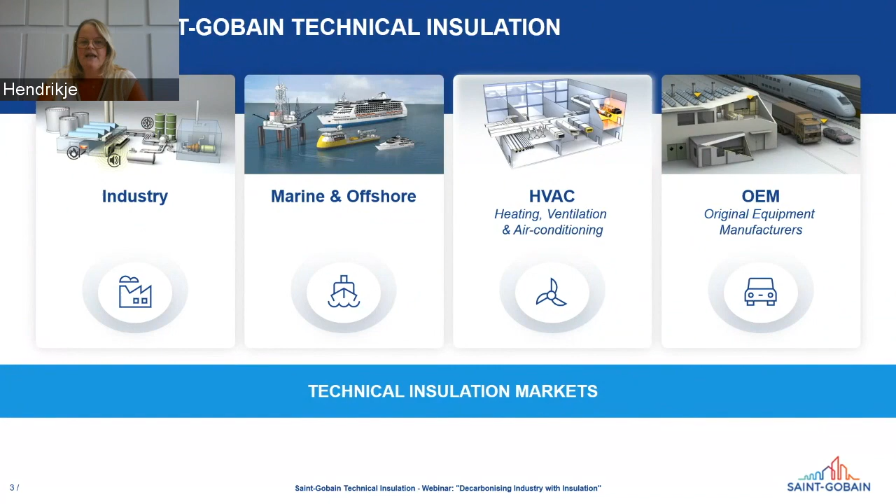We are present worldwide through our two international brands, ISOVER and Kaimann, as well as a certain number of local brands. Our strength is that we are not only global, but also local, because we have dedicated teams in a certain number of countries, with dedicated production sites in many regions. All this allows us to be close to our customers.

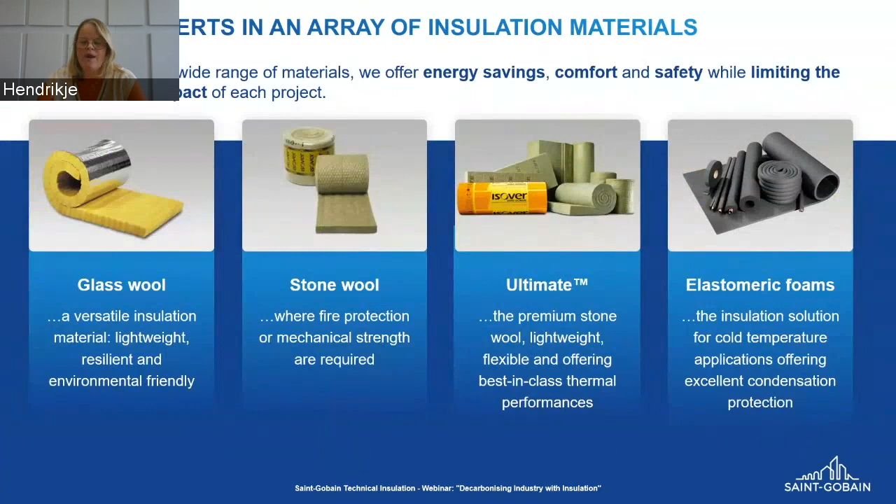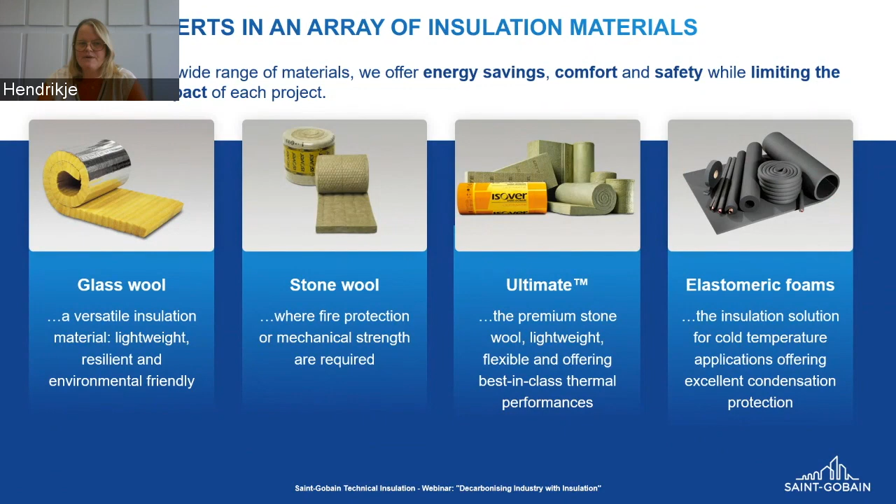We are experts in an array of insulation materials. The ISOVER brand stands for mineral wool solutions out of glass wool or stone wool, mainly used for applications above ambient temperature, which can go up to very high temperature applications, up to 700 degrees. The Kaimann brand stands for elastomeric foam solutions, dedicated mainly for cold applications below ambient temperature where there is a risk of condensation.

Today's topic is decarbonizing industry with insulation. We will hear during the next 45 minutes how insulation can have a positive impact on energy consumption and on CO2 emissions in the industrial sector.

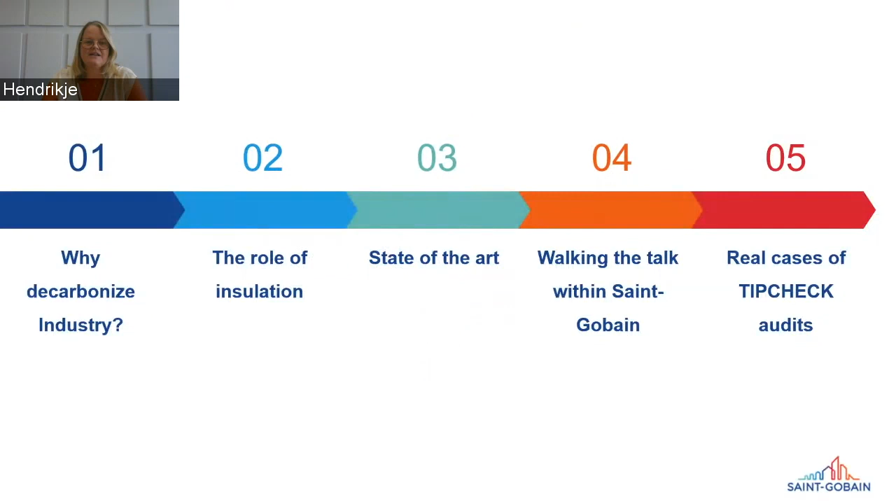Let me explain very quickly what the agenda is for today. We will go through a path of 5 different blocks in this webinar. First we will try to understand through the figures what the position and role of insulation is. Later on we will have a look at the current state of the art and future possible state of the art of insulation inside the industrial world.

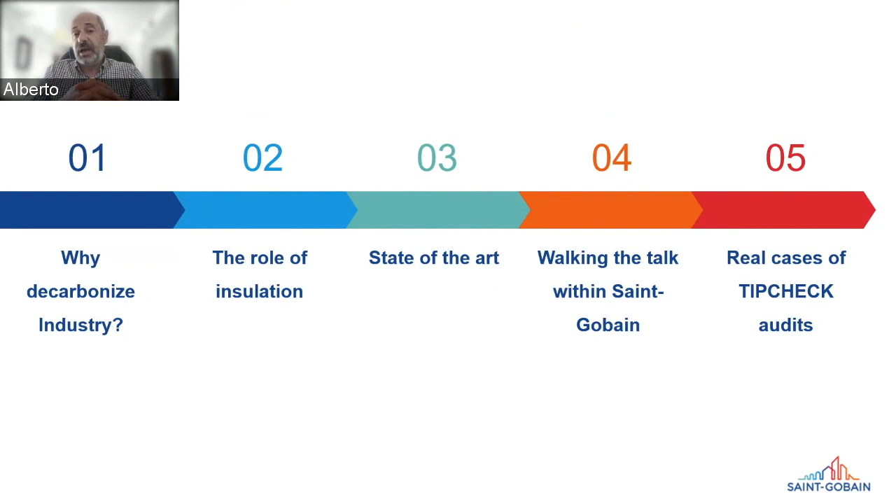Finally, we will show you some real examples of how we are doing things inside the Saint-Gobain group, and some TIPCHECKs that you will see - what a TIPCHECK is inside this presentation that we are performing - and which results come just behind.

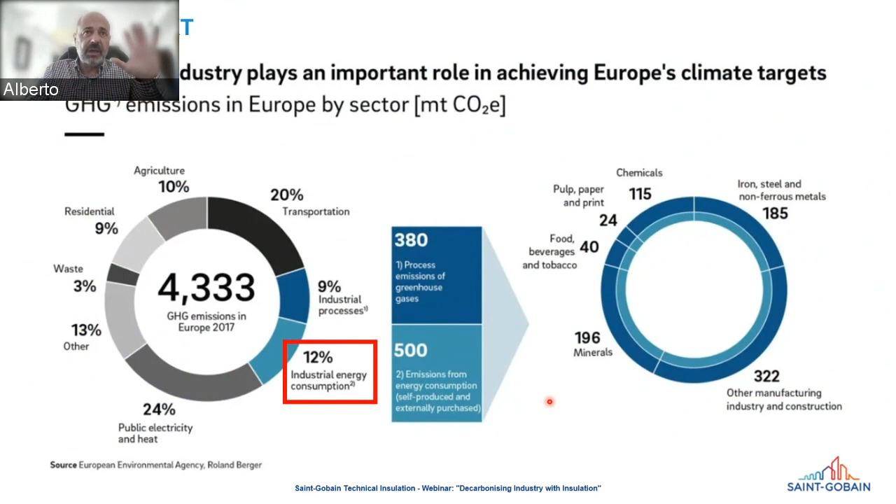And here is where you will see that insulation can play an important role, even more in dealing with today's situation. We have a lack of energy resources in Europe. With the crisis with the war in Ukraine, we can see that we are struggling for having gas in our stocks, and even the same with the fuel. So actually the prices have rocketed in the last 2 years, and it's not only about prices, but about the amounts of energy resources that we have in our hands.

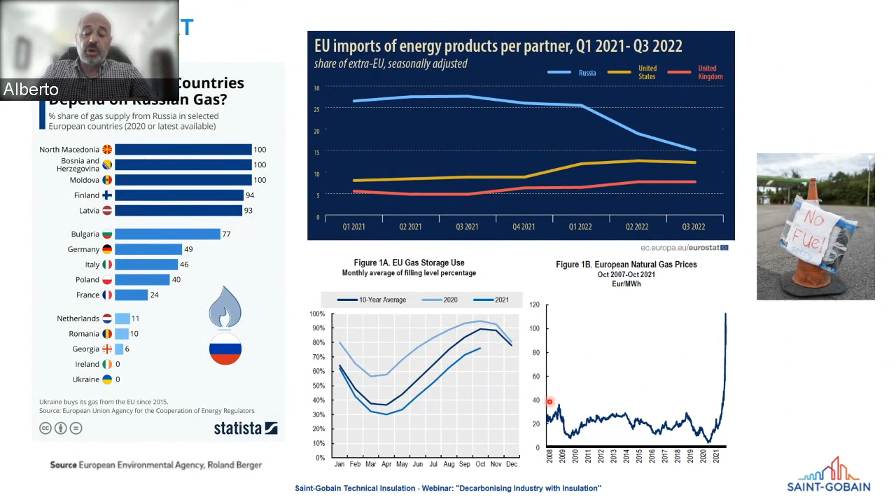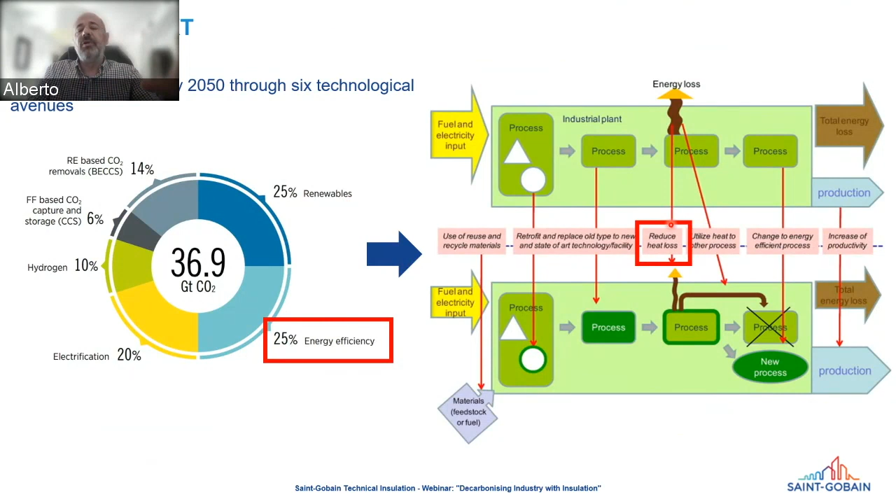So let's have a look a little bit deeper about the role of insulation in this kind of game that we have. And the first thing that could give us an impression of how our systems are working is the surface temperature that we have in our machines, in our pipes, in our flanges, in our valves, in any kind of element that we usually have in an industrial plant.

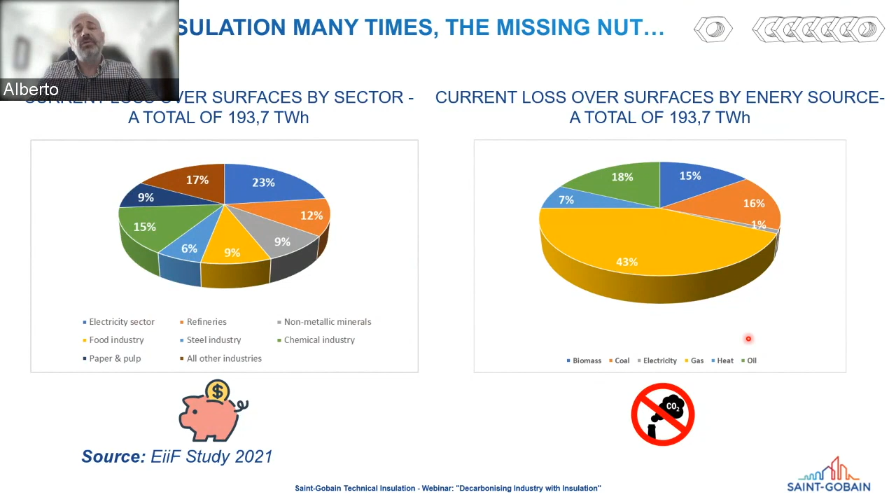And if we have a look at the energy sources, the consumption of these energy sources, we see that the biggest issue that we have in industry is really linked with gas. And gas is precisely what we are lacking, because the gas coming from Russia in the north of Europe is not coming anymore. So the situation is becoming quite critical. But in front of CO2 emissions, you see that gas is playing an important role, and gas is emitting CO2 as well. So no matter how you look at it, it's quite easy to understand that we need to attack these massive losses that we are having through the surfaces of our equipment in the plants.

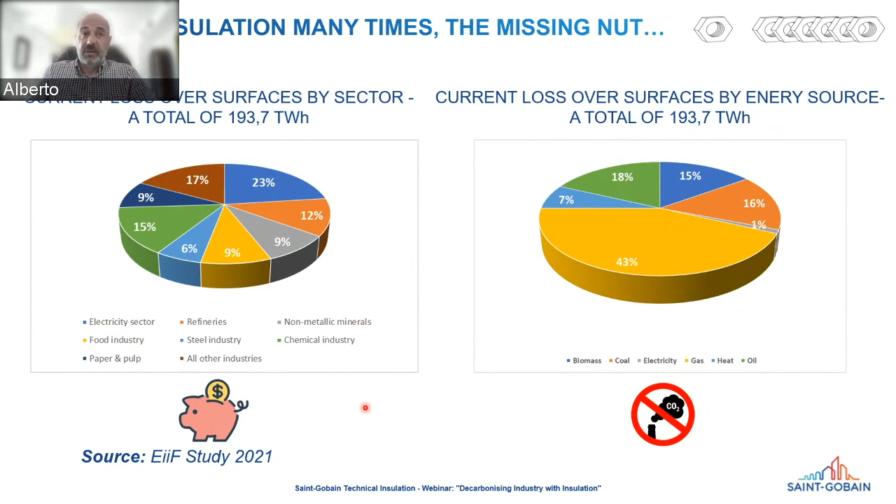So how big could the savings be? Something like 10 years ago—and I will tell you a little bit more about this European Foundation—there was a study carried out in Europe just to understand how big the losses were and what was the potential in terms of savings.

And what they analyzed were two different scenarios: the current scenario that we have, and then two different scenarios. One scenario is if we would design our stuff with a cost-effective look, let's say. And there's another scenario that is a little bit better, designing our processes and our machines with an energy-efficient approach.

That is a little bit different. In some slides, I will show you a graph that probably will make it very clear.

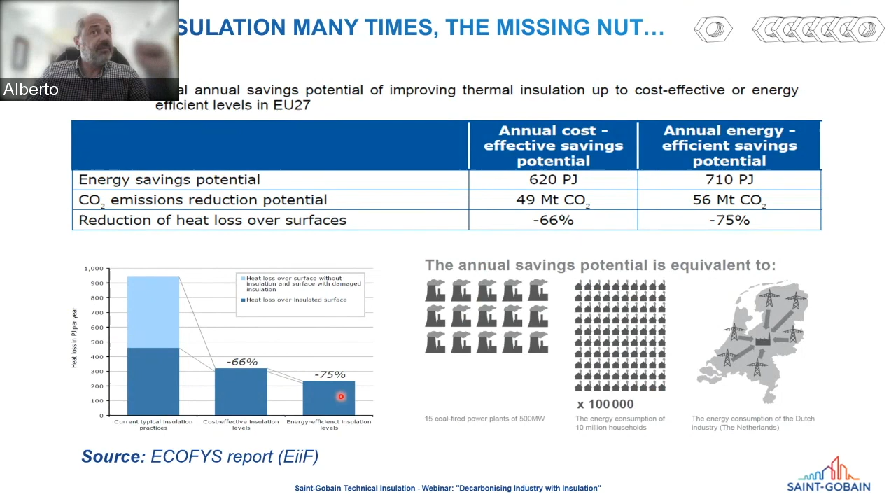Coming back to these two different schemes, we could reduce these losses by 66% just by designing our items following a cost-effective scheme, and we could even save up to 75% of the total losses through the casings and claddings of our pipes. So now it seems to start being clear that massive savings can be done relative to the use of insulation alone.

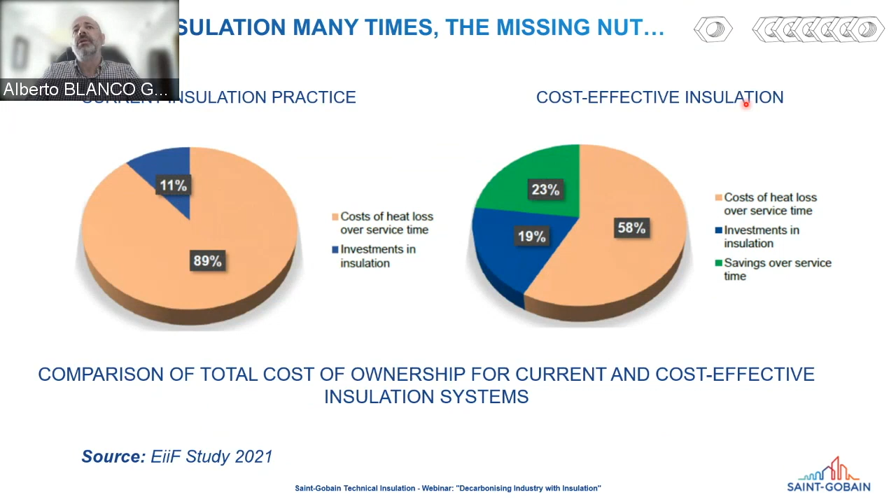Our proposal, when we suggest moving to cost-effective insulation, is to increase this 11% up to 19%, so increase the insulation amounts, and just by that, you can reduce your total bill along the life of the element by 23%. So again, the savings are quite massive.

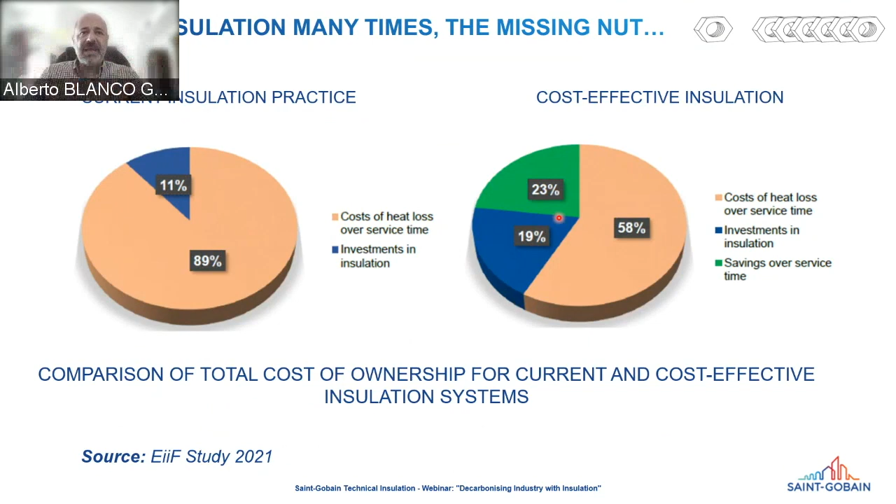But still, I guess it's quite difficult to make an idea of what these losses mean. So let me show you one example: imagine an uninsulated industrial valve. In this case, not a very big one, so DN 150, with an inner temperature of 150 Celsius degrees. In industry, 150 Celsius is not so high a temperature - it's quite normal to find processes with 300, 400, even 500 degrees.

So this temperature is not extreme, it's quite normal in an industrial process. Let's imagine this valve is working the whole year, all the time. The energy losses per year in this single uninsulated valve would be around 10,600 kilowatt hours along the whole year. Is that big or not? Probably so far you cannot understand exactly how big this figure is.

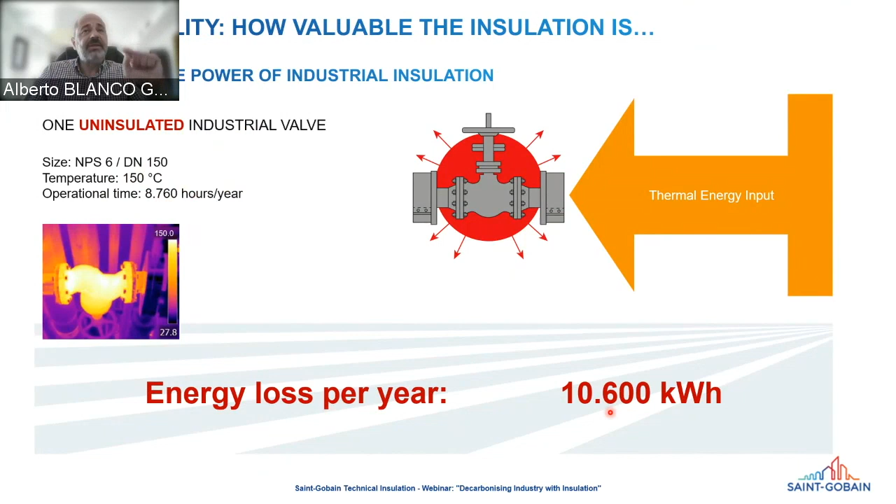But what you will understand immediately is that just by insulating this valve, we could dramatically drop the amount of energy lost. Our energy savings per year could be around 10,000 kilowatt hours, reducing the losses from 10,600 down to 600 kilowatt hours - a 95% reduction of the total losses we had before insulating this valve.

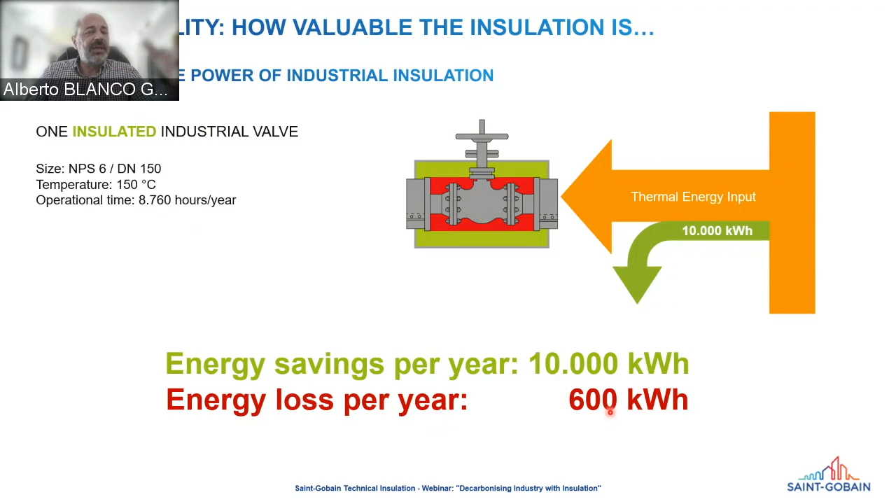Coming back to these figures, when we talk about kilowatt hours, nobody understands how big it is. Let's illustrate it with a real example: if we translate this 10,000 kilowatt hours we can save just by using insulation, we could run a Tesla model for 20,000 kilometers.

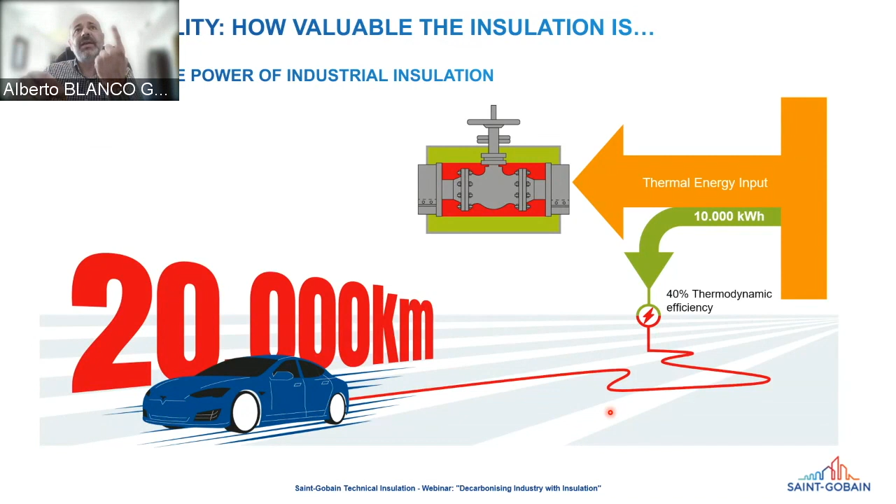Now you have a clear image of how big the energy we are losing in one single valve is. Let's imagine a real industry, a typical petrochemical compound. It's quite normal to have 20,000, 30,000, up to 50,000 valves and flanges in the processes of one refinery. So now multiply this 10,000 kilowatt hours by 50,000 elements or fittings that we could have in the process.

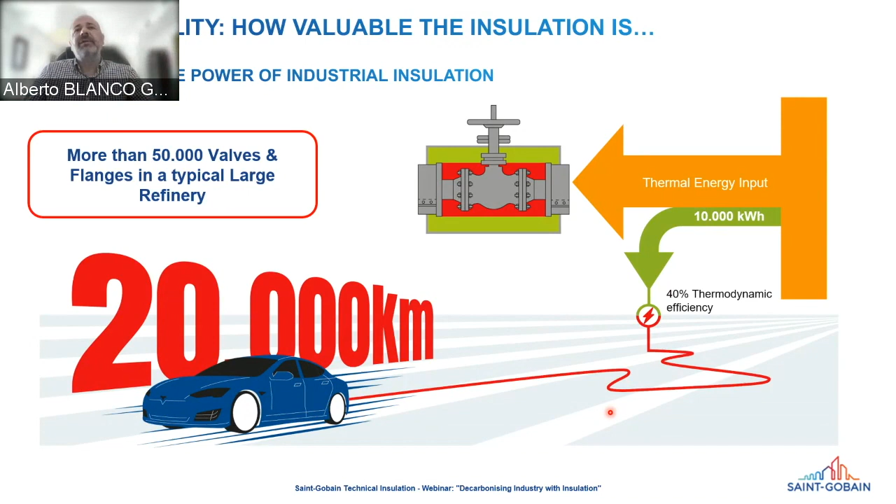Now I think the idea is quite clear about how massive the amount of energy is that we are losing, the thermal energy that we are losing in our industrial processes. Maybe it's the first time you're in front of this clear idea, and maybe at some point you feel a little bit dumb because you think, okay, I never thought about this. But believe me, you are not the only one.

Here I would introduce myself a little bit. Before being in this position, as Hendrikje introduced me, I was production and maintenance manager in one of our plants, one of our insulation plants.

Every single year, my colleagues from the EHS department came to my office and asked me, Alberto, what do you have in mind for next year? How are you going to save energy and reduce the CO2 emissions? And I was always thinking, okay, we will improve the leakages in our compressor and use the compressor only when it's required. We will change the valves to efficient valves. We will play with variable speed drives. We will buy more efficient engines, blah, blah, blah.

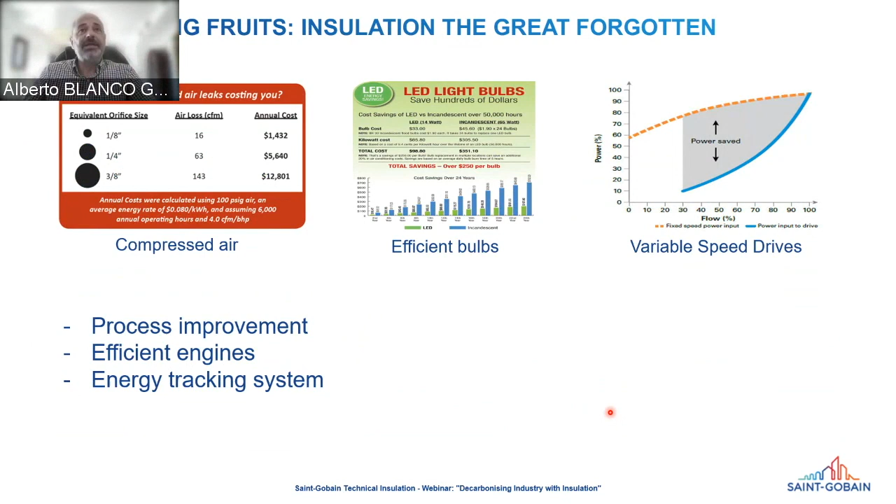But I never, ever, even working in insulation, thought about insulation as a possible source of energy saving. And it's really a low-hanging fruit. It's something that is quite easy to be done.

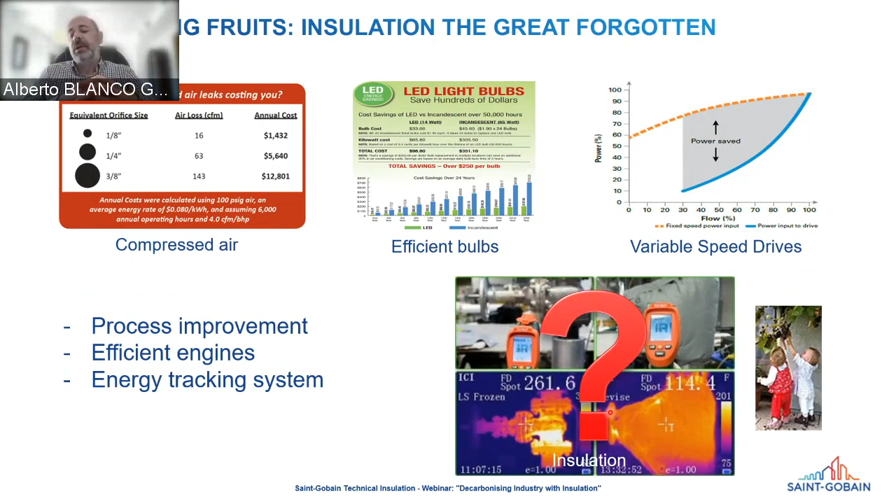So just having this in mind, how was it possible having this situation in Europe and nobody seemed to be doing anything? Well, that's the reason why a little more than 10 years ago, what we call the EiiF Association, EiiF being the acronym for European Industrial Insulation Foundation, started to develop work on this topic. The main aim of this European foundation, a non-profit foundation, is to promote and establish the use of industrial insulation as a widely understood and accepted means of achieving sustainability.

So it's completely linked with CO2 emissions and energy. And actually, you know that in Europe we are not achieving exactly the targets we set for ourselves. In 2020, we failed to reach a 20% reduction in energy consumption. And why is that? The reason behind that is the lack of regulation in industry.

When we compare the situation we have in industry with the one in the building industry, we see that it's absolutely different. In building, we have very clear regulation about the losses we can have through the walls or the roof of our homes or buildings, right? And they are pretty low. If you look at the figures on screen, they point to 10 watts per square meter.

But when we go to an industrial setting, imagine a power plant, and compare the temperature in the processes inside, which could be around 250 Celsius degrees on average, compared with the 20 or so degrees in our homes, you see the losses imposed by the building code. But in industry, we have nothing that is really compulsory. The only thing I could find is a kind of indication in an old German standard recommending something around 150 watts per square meter.

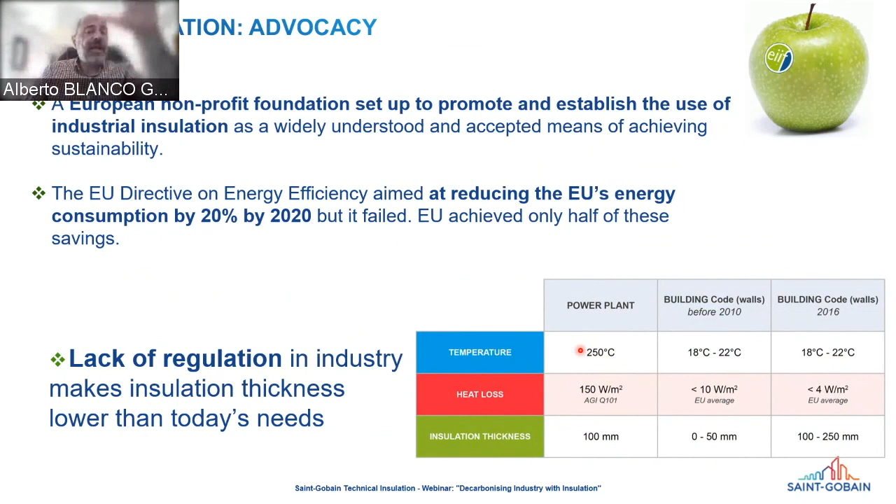In this case, you see that in these processes, having 250 degrees inside the pipe or duct, we use on average 100 millimeters as insulation thickness. So you see that even in modern building codes, we use more insulation for 20 degrees than for 250 degrees. In principle, it doesn't make sense. So, making a kind of summary about all the good things insulation could bring us in terms of energy efficiency and CO2 reduction.

First of all, for the climate, clearly we can reduce up to 45 megatons of CO2 emissions, as you saw previously in one of the slides. We could increase the energy efficiency, and by that, support the circular economy somehow.

For Europe, where we are living, we would contribute to the Green Deal. Remember, keep in mind, we have targets for 2050. We could create and save jobs in Europe. Quite a lot of money is dedicated to the green recovery of Europe, so a lot of business is done there. And finally, for our processes and industries, increasing our competitiveness compared with other industries that are not so efficient in terms of energy and CO2 emissions, and of course, creating safer and better working conditions.

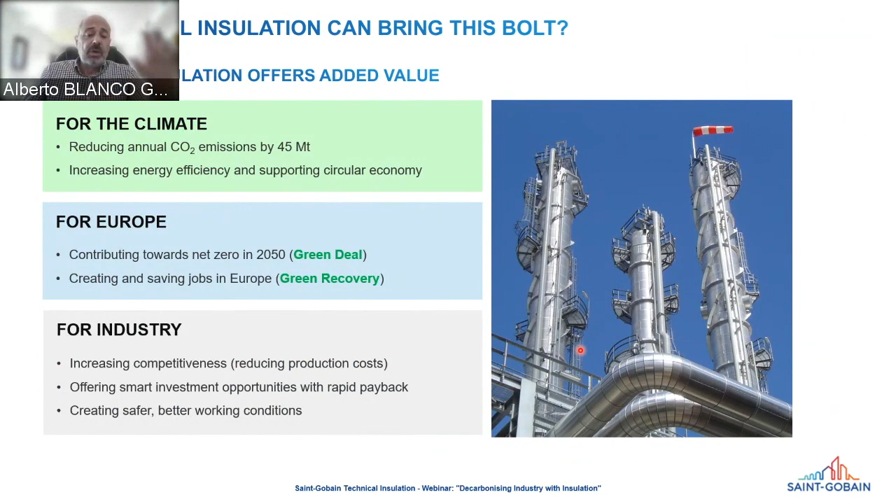In principle, insulation was used only for safety purposes, meaning for not getting burned. But this approach could be valid 50 years ago, because energy prices were really very low and CO2 emissions were not really in our minds. But today, I think this approach is not possible anymore.

The problem with this approach is that it doesn't take into account the energy and money saving potentials. So at the end, with this approach, you are losing a lot of opportunities. It's good for not getting burned, that's okay, but I think many more things could be done.

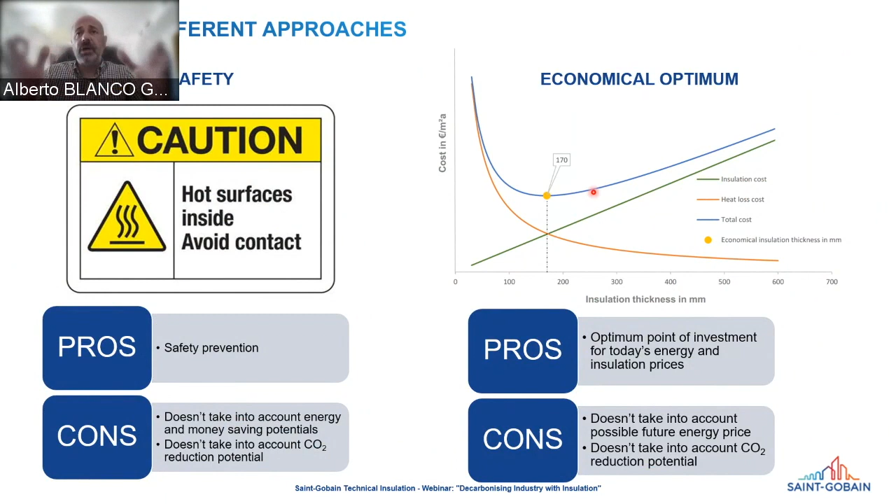This approach is good because at the end you are taking into account the energy and insulation prices of today. This is the pros, but it has cons too. The con is that it's not taking into account what could be the energy prices in the future.

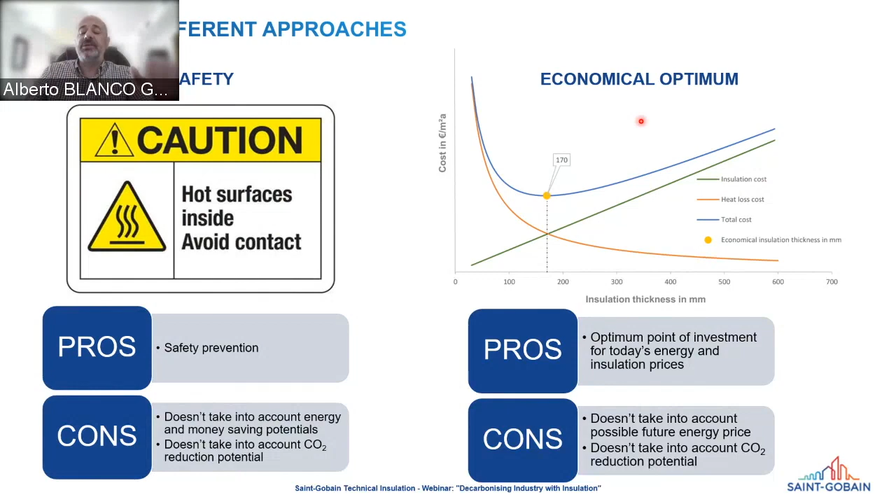Imagine you designed an element 3 years ago, and some months afterwards you have the crisis that we have nowadays in Russia. It's possible that this point would have changed, would have moved very to the right, yes, because the energy prices are changing. So this way of designing is a little bit static, let's say, and it could be improved. The other thing is that it's not taking into account the CO2 emissions, it's only cost-based, so it could be improved.

Now, if we look at what I think will be the future, and it will be coming quite soon, there's a German standard, already official in Germany, called VDI 4610. In the European Union, we are working on a new standard that will be called EN 17956. There's a definition of energy classes, and these classes are defined following what is called an ecological calculation.

The way of thinking is more or less the same as in the previous graph that I explained to you. But in this case, instead of comparing the cost of insulation and the cost of energy, we are just summing up the total emissions from operations, when the material is really installed, and from the manufacturer.

So for producing this insulation, we need to emit a certain amount of CO2. So when we put together the total emissions that we are creating by one insulation solution, we have again an optimum. And this optimum is what is called the ecological optimum, right? And in my opinion, this will be the future of how to design insulation systems.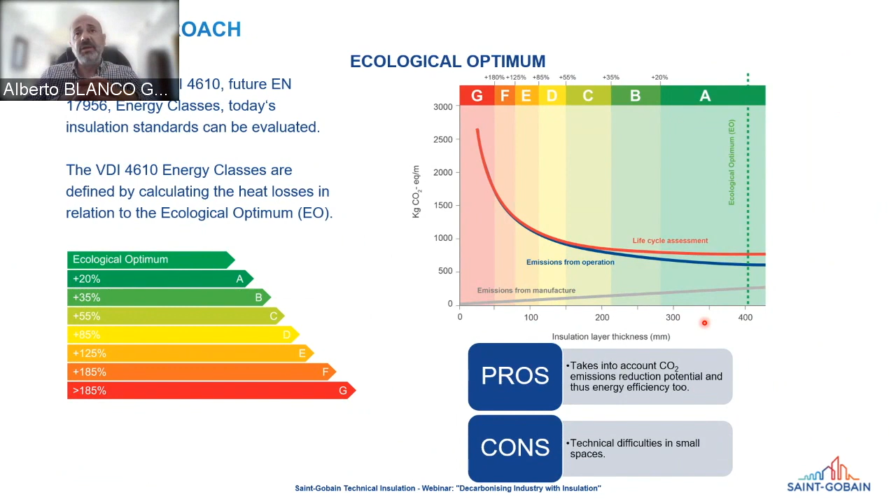And probably, even coming from the governments, from the state, even from the European Union, at some point, for receiving subsidies. This is actually the case in Germany. If you want to receive a subsidy from the German state, you need to fulfill being at least Class B, following the VDI 4610 scheme. So it means that they are pushing you, if you want to get some money from the state, you need to fulfill at least certain requirements.

So this is, in my opinion, a very important step ahead that will change completely the way that we are designing today's insulation systems.

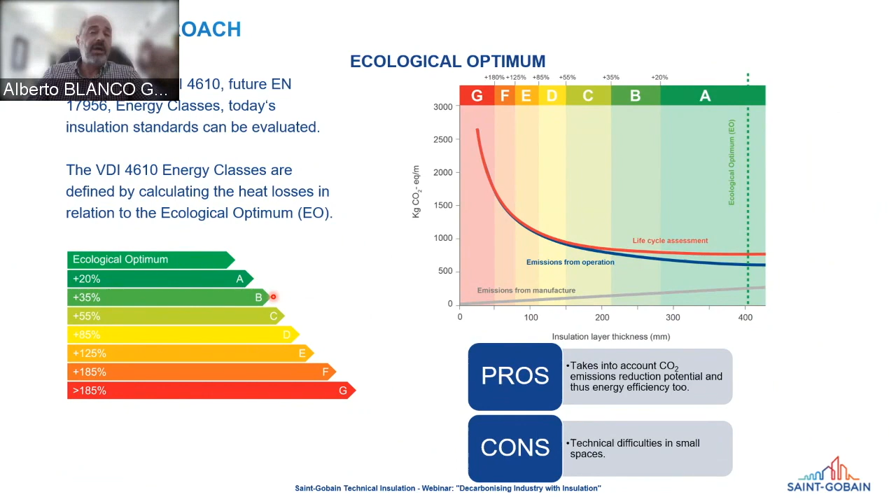So just to illustrate a little bit how much it will change, here I ran a comparison between the current state of the art. Imagine a process having 180 Celsius degrees with an insulation thickness of 150 millimeters, the typical stone wool material. In this case, with this insulation, you would be Class E regarding the German VDI standard. And the current thermal losses that you would have in your process would be around 50 watts per meter.

In this case, if you would design the system following the schemes given in the VDI 4610, as a Class B, you would reduce this amount of energy by 44%. So it would come down to 28 watts per meter. But you should use a thickness of 230 millimeters, even having a more performant material than this. So you see that the change in the insulation thicknesses, and even in the insulation performance of the material, should be increased and should be changed, right?

And I think that this is what we have in front of us. Making the same exercise, but with the total amount of energy that we are losing in the European Union of the 27 countries that we have today, you see that we could come from 16.7 megatons of oil equivalent to only 2.7. So again, massive savings linked with this new approach.

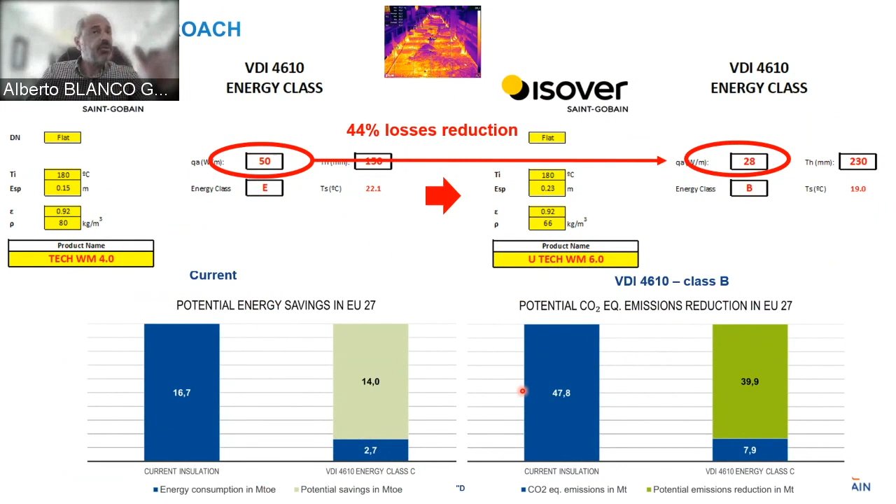So that's why I think that there's no escape from this new approach. For me, this is what will happen. This is what I was telling you regarding the thickness increase. It's really a change in the current approach.

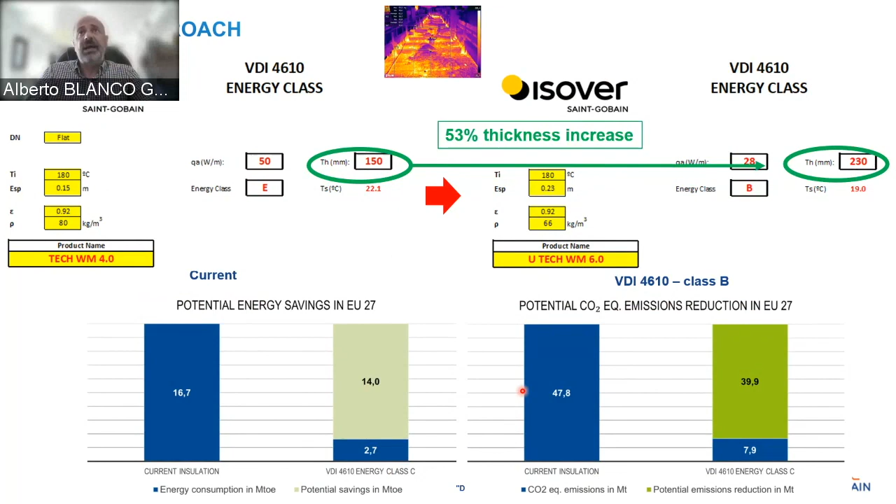So now I would like to tell you how we are walking the talk inside the group. All these things that I explained—what are we doing inside a big industrial group like Saint-Gobain? The first thing that we did is just acquiring the knowledge. That's why we went through the qualification program given by this European Foundation for Industrial Insulation.

And we now have a big bunch of people around Europe, and even in other parts of the world, like Saudi Arabia. We have people that are really prepared just to study and see how the processes are, if they are good or not. And this is not only to be carried out inside our group, but as well dealing with the problems that our customers could have regarding insulation.

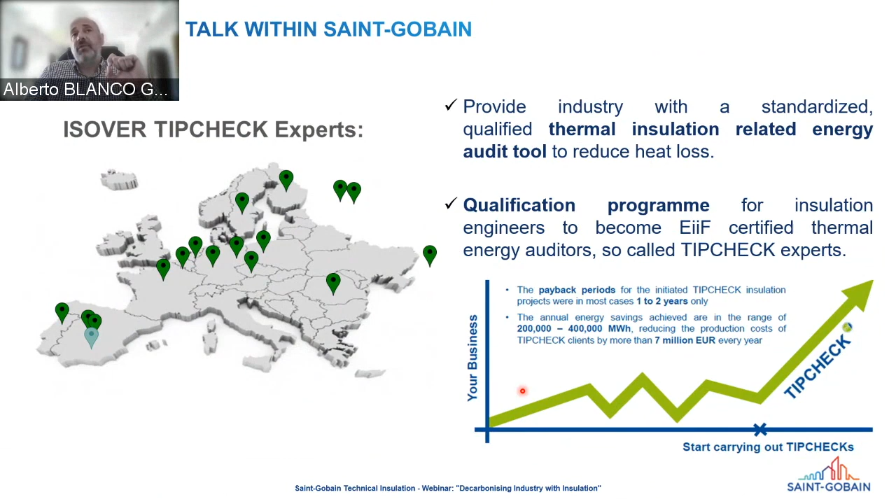So the first thing that we usually do is analyzing things. But as I told you, this is for customers and inside. But inside, we developed an internal program that we call TIP-4-BEST. Here, the scope is the thermal insulation performance checks. So it's a kind of audit program.

And the aim was boosting energy efficiency, increasing the safety in our processes, and improving as well the temperature control that we have. And by that, in some cases, we could reduce the heat losses by a quarter, which is quite a lot.

And when we started with this program, we had two real targets in our minds. First, improving the processes in our plants, and second, showing by our example that we lead really by example, showing our customers real examples and trying to develop with them exactly the same things that we did inside our plants. So the first expertise that we had came from our own processes and plants. And this is what we are trying to extrapolate to our customers, right?

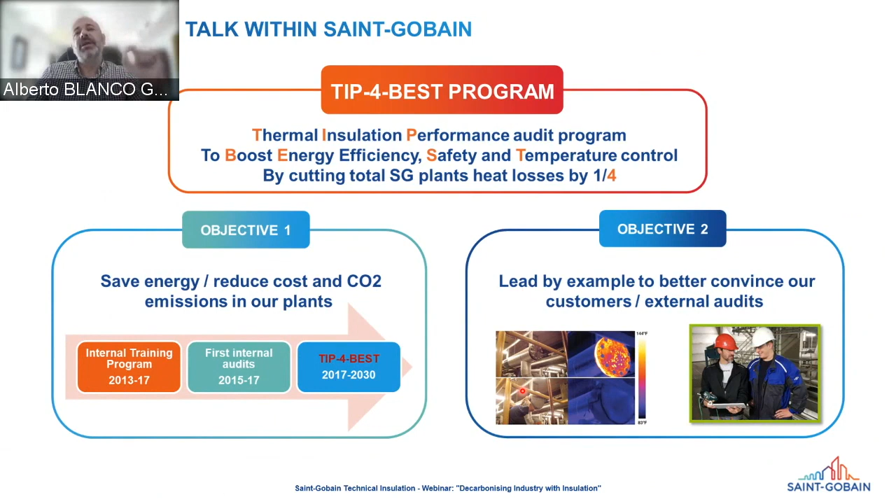One thing we realized when we started this program, after analyzing many processes, is that the design phase is absolutely key, because replacing insulation afterwards is not so easy. That's why now we have defined a new Saint-Gobain insulation specification.

So now what you have in front of your eyes is an official document inside of Saint-Gobain that is exactly the insulation specification. This specification is quite advanced, because it has been developed following exactly the criteria given in the VDI 4610. Now we are designing our machines, pipes, flanges, and elements following an ecological class B. For example, in the Saint-Gobain group, in new designs, we could receive subsidies from the German government if we invest in acquiring this ecological class B.

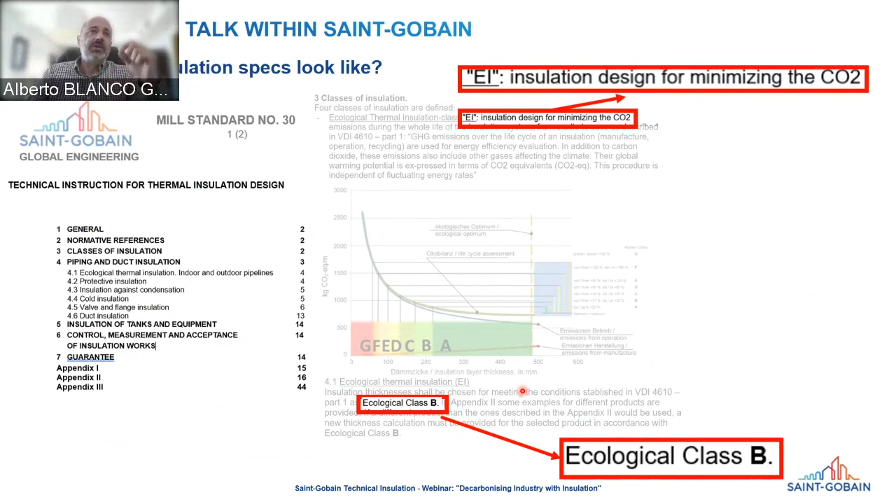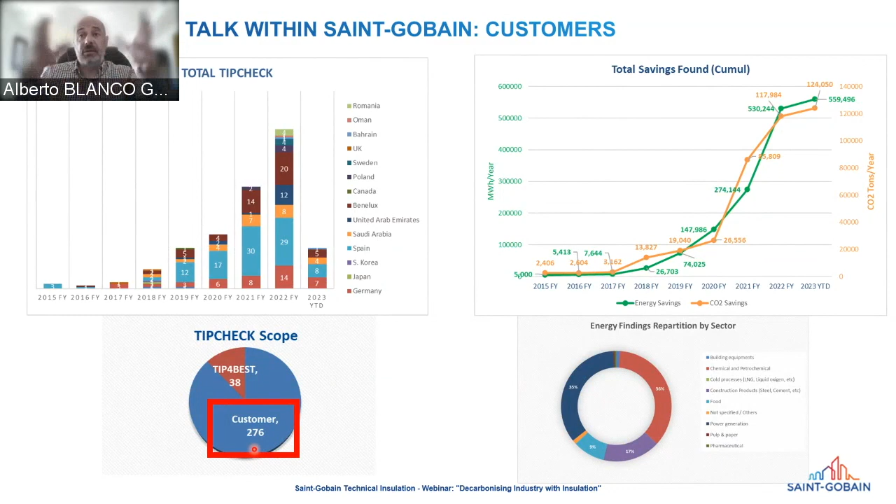Regarding our experience, in this graph I think it's quite illustrative about the amount of experience that we have. You can see that we have carried out more than 300 audits internally and externally. We have audited 38 plants inside of the Saint-Gobain group, and we have run 276 on customer facilities.

By doing this exercise, we have found out a crazy amount of CO2 emissions that could be saved, and megawatt hours that could be saved as well. As you see here in figures, we are talking about more than 500,000 megawatt hours, and in terms of CO2 savings, almost 124 kilotons. I think these figures themselves illustrate how big the opportunity is.

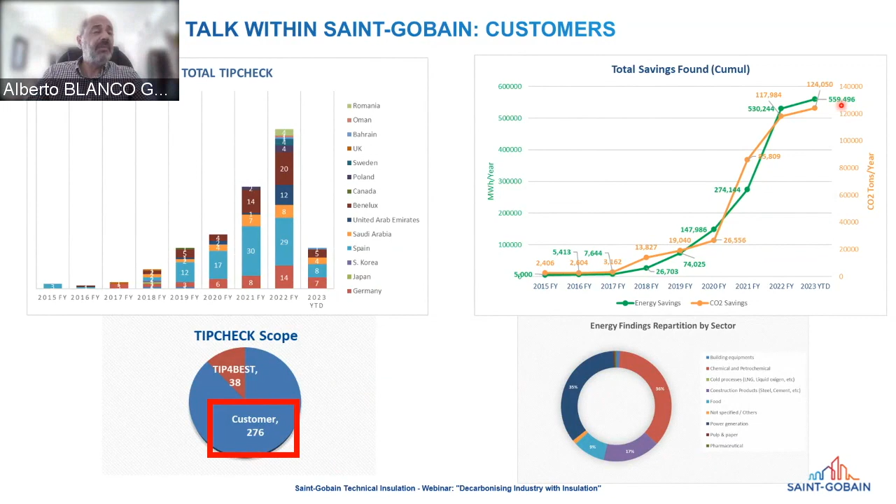How can this really be achieved? The method we follow is studying four different things. First we analyze if the insulation material can be improved or not. Later on, we study what would be the perfect insulation thickness, either for achieving the economical solution or the ecological solution. We study what is the state of the art regarding thermal bridges, because they could represent an important amount of energy lost. Finally, we look at the cladding, the outer surface of your processes.

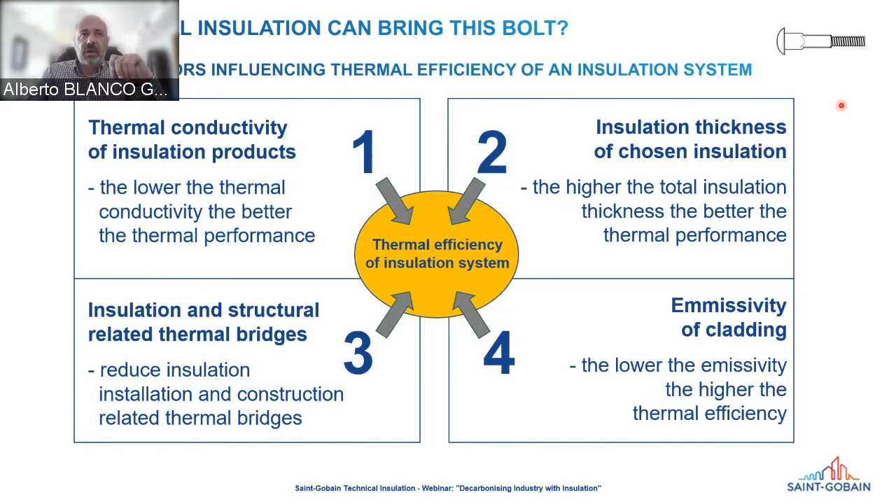This is a real example that we carried out on a steam pipe. This steam pipe was designed for safety, having less than 60 degrees surface temperature. Just by changing the insulation, optimizing the thickness, reducing the thermal bridges, and changing the cladding to one with lower emissivity, we could at the very end reduce the total losses by almost 50%, 49% exactly.

So with this, I guess you have a very clear idea of how just by improving the insulation in your processes, you could reduce your energy bill down to 50% of the current amount you are paying. And of course, in parallel with that, you have the CO2 emissions. Sustainability is absolutely linked with energy, with the use of energy.

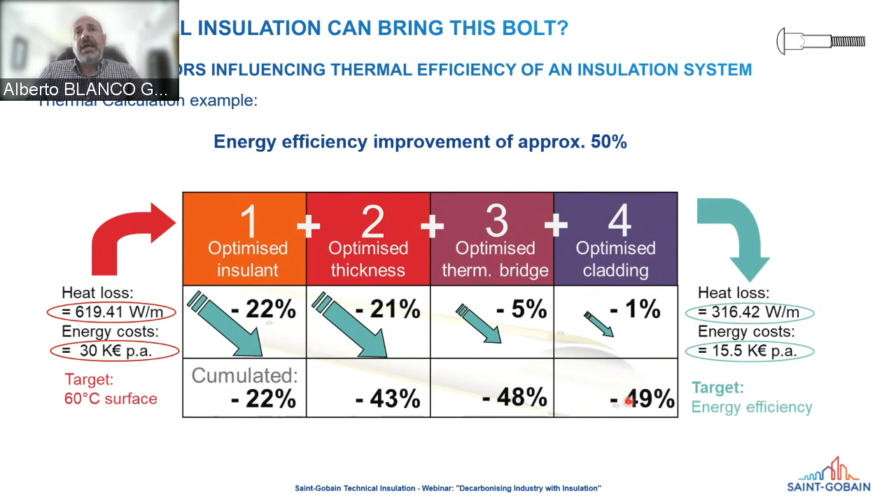So now I guess you have a clear idea of what our business is about in ISOVER and in Kaimann. What we can help you with, if you need it, is we can improve the current insulation specification you have in place by studying exactly how it could be improved regarding material thicknesses, improving thermal bridges, as I explained.

We could even run audits in your facilities. We have software prepared for running not only thermal analysis, but economical analysis as well, in terms of payback time, total cost of ownership, and these kinds of things. And of course, everything is based on best-in-class technical materials.

As Hendrikje introduced, we are the only ones with a multi-material approach. Depending on the temperatures, we can deal with elastomeric foams coming from Kaimann, glass wool coming from ISOVER, or stone wool coming from ISOVER as well, or even Ultimate, which is the last generation stone wool.

Thank you very much. This was what I wanted to tell you and introduce to you. I will give the floor to my colleague, Juan José Orta, and he will explain some real cases performed in these audits.

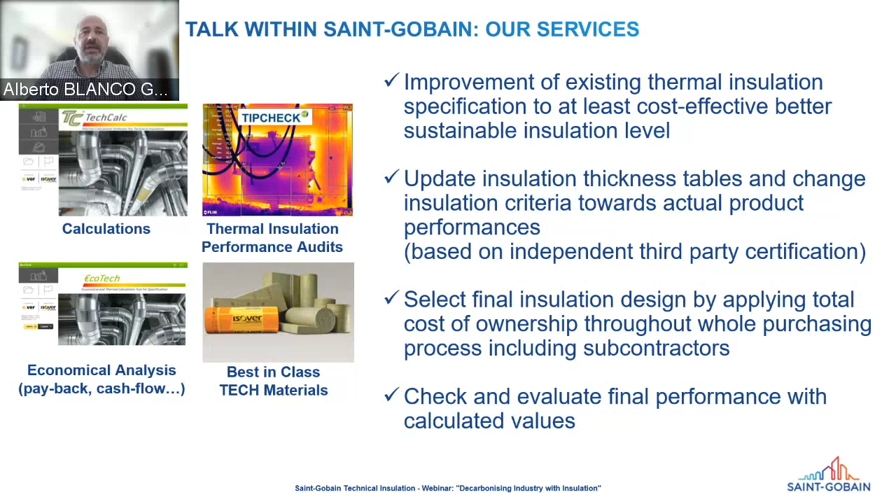Thank you very much, thank you so much Alberto. I am going to show you some real cases of thermal insulation inspections.

But first of all, I want to ask what is a TIPCHECK audit or thermal insulation audit. TIPCHECK inspection is an inspection to evaluate the thermal performance of the current insulation in existing or future plants.

We calculate the energy and money savings potential and the CO2 reduction potential. These audits demonstrate that with a better efficient insulation, the owner of the plants can save energy, can save money, and reduce CO2 emissions. This type of inspection is divided into 6 different steps.

One of them is the technical preparation. We talk with the owners of the industrial plants to agree on what is the goal, what is the target of this type of inspection. We do a visit of the plant to know what type of process, what type of systems we must inspect.

We execute the TIPCHECK. We analyze the state of the current insulation with thermographic cameras and other equipment. We collect all the data we need to do the calculations, and with different software, we calculate the energy savings potential, money savings potential, and the CO2 emissions reduction.

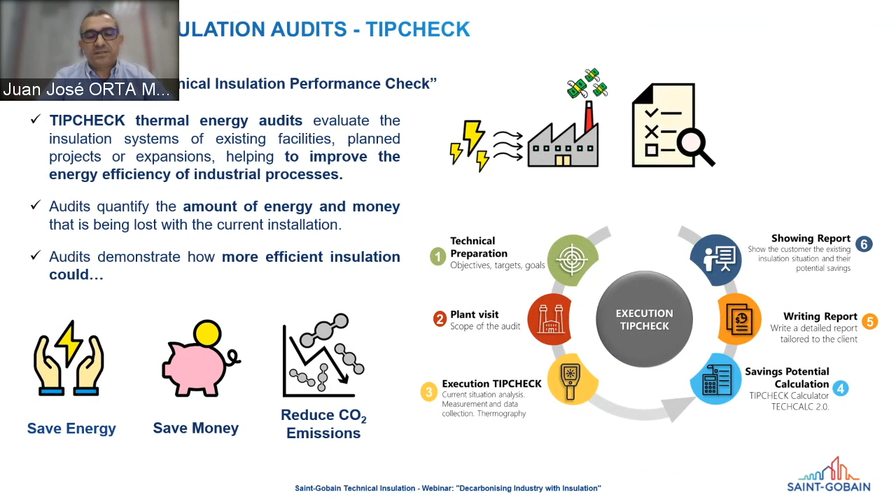We put all these conclusions and calculations in a report, and we show the customer the state of the current insulation, for example if it is damaged or uninsulated, and all the data about the savings potential. We have done some audits in different plants, and we can show 2 real cases.

The first of them is 2 fuel storage tanks. We did this inspection in 2021, before the current crisis. The tanks have a capacity of 14,000 cubic meters, with a dimension of more or less 30 meters diameter and around 20 meters high. We realized that the insulation was very damaged and the insulation thickness was insufficient.

The value of heat loss calculated was more or less 225 watts per square meter. We detected energy savings of more or less 5,333 megawatt hours per year, money savings of 224,000 euros per year, and CO2 reduction emissions potential of more or less 1.5 kilotons.

After we presented this report to the customer, he decided to invest and improve the insulation of the 2 storage tanks, substituting all insulation, walls and roof, and increasing the insulation thickness. In this case, the heat loss decreased a lot, and the final values were more or less 15 watts per square meter, with an energy class C classification more or less.

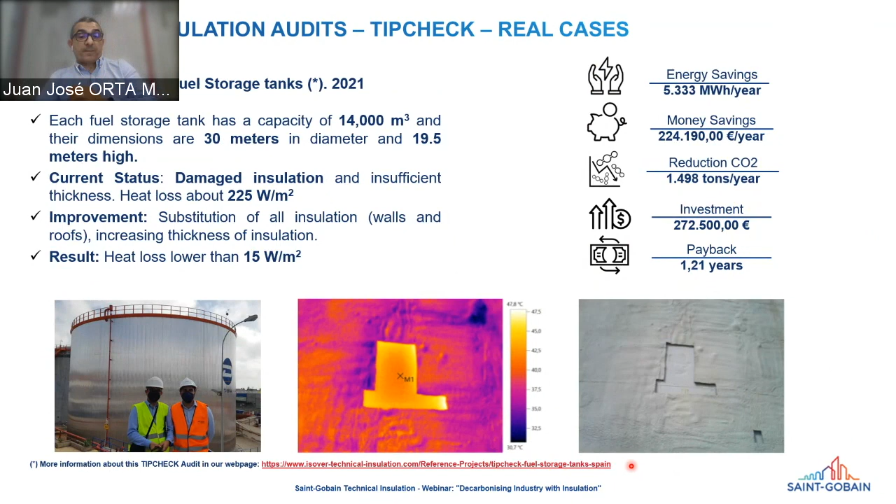Another example of the thermal insulation audits or inspection was different reboilers in the different cracking units in the petrochemical plant. We inspected 10 units of reboilers and auxiliary pipes, input and output pipes.

The current status of this insulation is the same as the other case. The insulation was very damaged and the thickness was insufficient. The data of the heat loss was more or less 540 watts per square meter.

We detected energy savings potential of more or less 778 megawatt hours per year, money savings potential of 124,000 euros per year, and a reduction of CO2 of more or less 162 tons per year.

All the insulation was improved, substituting the current insulation with a new insulation of different thickness. The thickness of the insulation was increased more or less double, and after the inspection and the investment, the heat loss was less than 80 watts per square meter.

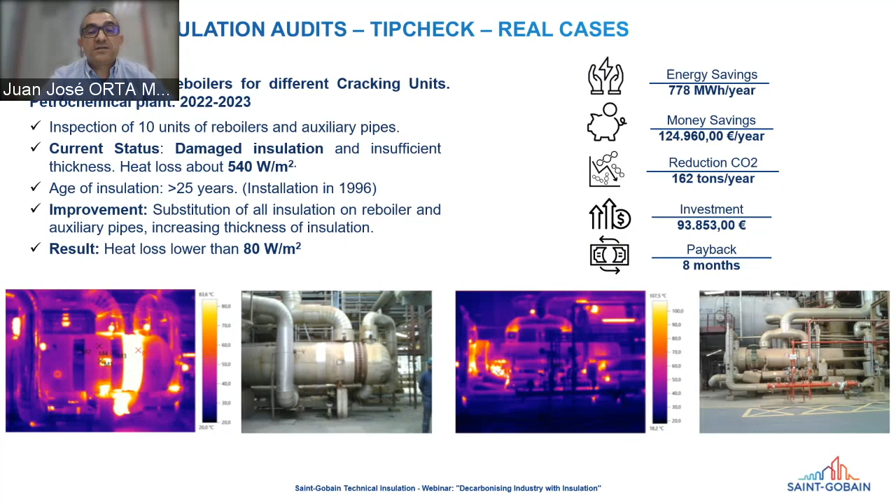Okay, thank you Juan and thank you Alberto for this very inspiring presentation. I think it shed a lot of light on the untapped potential of insulation in the industry. And yeah, we know there is still a long way in front of us, but I hope we all understand now that insulation is a quite easy and economical lever on the roadmap towards a decarbonized industry.

So we have now time for questions, and I will check if we have questions in the chat. So the first question: is it possible to influence the insulation thickness recommended that appear in codes and standards?

At the end, for improving what is actually included in the standards, there are committees, so yeah, it could be done. The exercise done with the VDI 4610 in the past in Germany is a good illustration of how thicknesses could be increased. They give you new logic rules that allow you to increase insulation thicknesses. But to be able to do that, you need to be part of one of the committees studying these kinds of things, usually engineers or technical people fully dedicated to insulation. It's possible, but it's a long way in terms of time, not something done from today to tomorrow. Usually it takes months or even years to change one standard. So the answer is yes, but it's quite long and not easy.